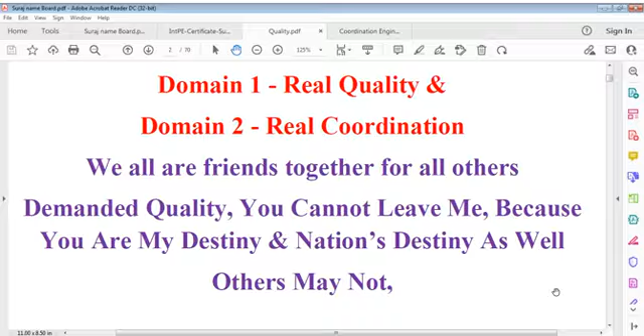That's what I say. It's a question of destiny of the project. It's a question of national destiny, and for engineers, it's their job. Engineers cannot run away. You cannot say I'm only a design engineer.

Responsibility exists because when you design, you have to consider the design of other services. They would raise you questions, or if they don't raise them, then you ask them how you are doing. It's not simply that giving a drawing is enough. They have to procure it also, and procurement means compatibility issues are involved for whatever item you buy.

It's a different factor. In civil engineering, we don't buy material ready-made, it's all done on site, on a batching plant, or whatever works. At least we get materials like tiles, finished materials, but that's also not complete, because we have to do it on site.

In the same way, you can buy some items ready-made in non-structural items, or in the structure itself we can buy reinforced parts, we can buy some other items, bushes, or raw materials. People call raw material natural metal, actually stone aggregate, or dust, sand or water. It means we have to deal with complete basic work, not built work.

In the mechanical world, built or fabricated works are delivered, similarly in electrical, or in the computer world, you can get a complete system. I don't think no coordination is required. The only thing is that we must have a complete system of that, and that's why I say quality is very important.

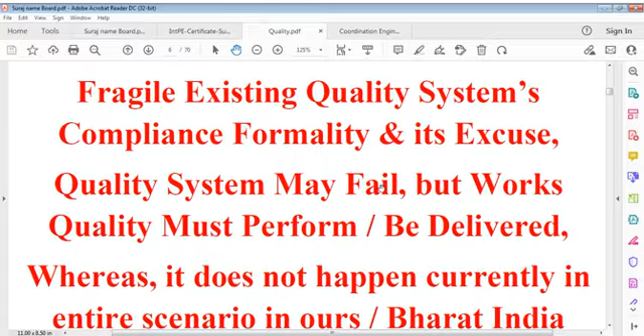We have to think further how to work. It has to work and it should comply. It's not simply formality compliance, it is application compliant. No excuse. Because the system is independent of product quality. The system can be fragile, can be broken, or can be maintained. But if quality is not achieved, in that case, the system does not mean anything. So what I say must be done. I don't want to just go every time.

Now we go to coordination. Reliable coordination in engineering projects is a very important point, because it's linked to people, it's the public of whatever nation, and engineers are involved. For reliable quality engineering deliveries, reliable coordination engineering is a must. It is professional engineering, a must for the profession. And if we miss coordination, it means we miss good engineering. No coordination means nothing, and I would stress people, I would stress everybody to coordinate as much as possible for better results. Otherwise, we have to suffer.

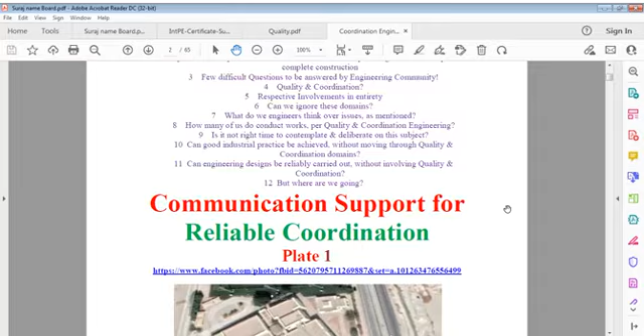And communication is a support for that. It's also a very important part. Quality and communication make this world. We cannot run away from this. How you do it is your own choice. Nobody can tell you about this because you are doing that job, you are master of that. And that's why you are an engineer, because you are master of that.

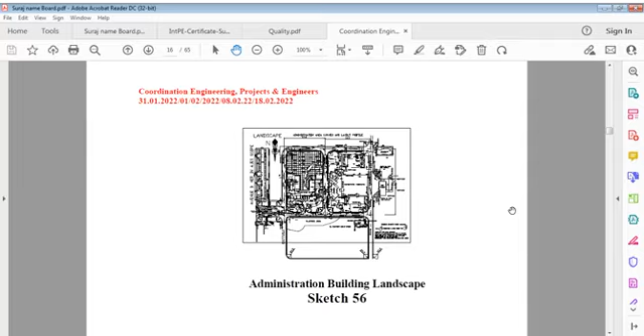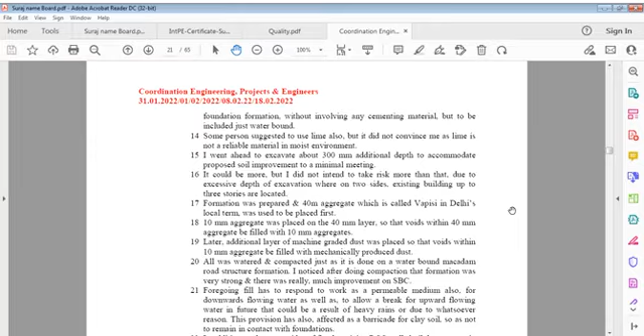Master means you know as much as possible, as much as is required, and if there's some deficient information, then you have to correct that, you have to take that information. It's not that easy, we think it is. It invites, it demands your attention. Your attention is a very important part in engineering, and that's why I always say continuation, or thinking, or how you think you can do it. That's a very important part, and it really happens if you think it's right or not right.

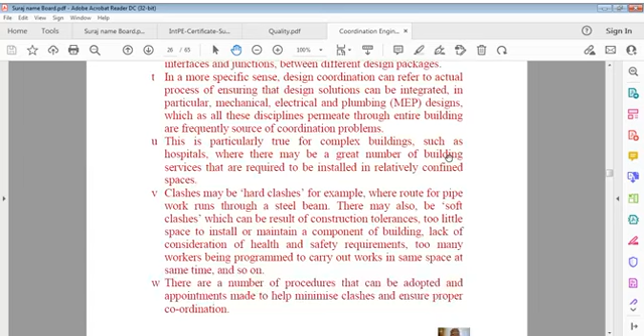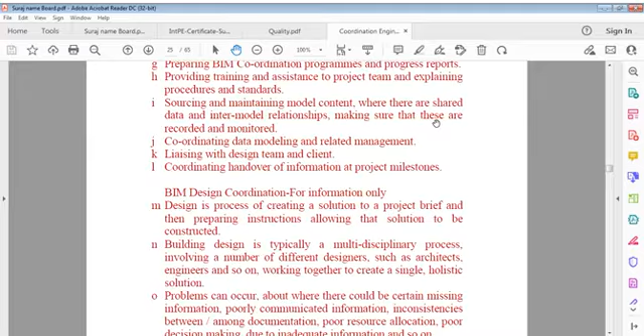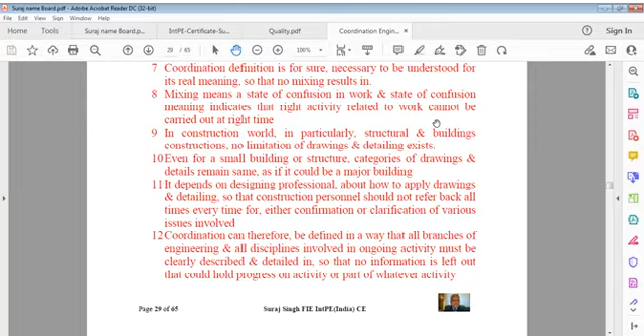Here's something I want to share with you. Of course, it's noting that doesn't go unnoticed. And I'm not going to talk about BIM design, because my mind is BIM. I think it's the mind that should be important rather than software for the purpose of doing work, because the mind tells a lot while others cannot tell. As I said, in every way, let us see what it says.

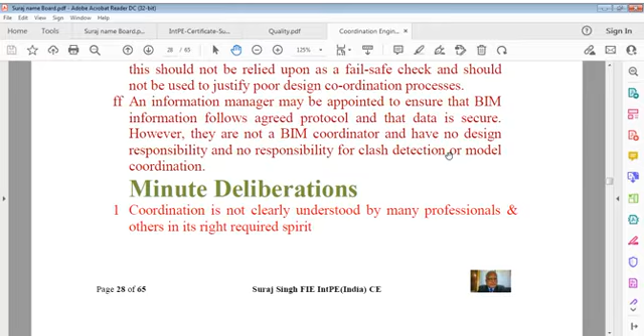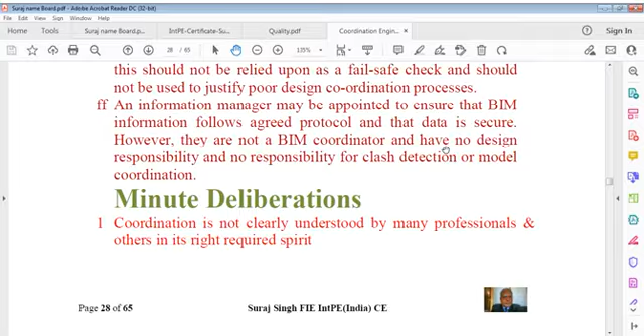Minute deliberation. Every day I talk a little in this case, and again I read for you that coordination is not clearly understood by many professionals and others in its right required spirit. They simply say coordinate, but explanation must be provided what is coordination, and that's what's important. Also, the fact remains that without adequate and efficient coordination in professional engineering, works cannot be successfully accomplished.

If I could claim, it shall be right to admit that coordination failure leads to engineering design and construction failure. Is that right? If I could claim, it shall be right to admit, it is correct to admit that coordination failure leads to engineering design and construction failure. Shall you agree? It is a fact. If coordination fails, it means your design, construction fails, design fails. We do want, you have designed excellently well, but a person responsible to do it could not get it, could not do it, and construction has been done, but it has not been done according to the mandate or design. I call design also a kind of mandate for that particular activity.

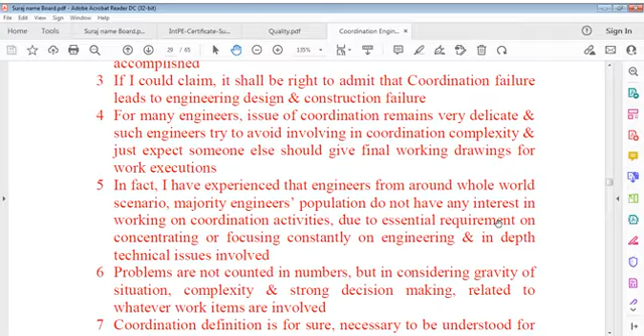For many engineers, the issue of coordination remains very delicate, and such engineers try to avoid involving in coordination complexity. They just expect someone else should give final working drawings or details for work execution. In fact, I've experienced that engineers from around the whole world scenario, the majority engineer population do not have any interest in working on coordination activities due to the essential requirement of concentrating or focusing constantly on engineering and in-depth technical issues involved.

You might have seen many engineering graduates from very reputed institutions, after getting through examinations, shift to other fields like management, MBA, or IT, because the outlook of these people, these engineers, is only the package of success and not true development. Engineering is the basics, is a fundamental of the development world. Of course, it cannot provide you that package, but it can provide you development. That's why I say, I have experience from world engineers, world people, and they run away from coordination. That is very bad for everything.

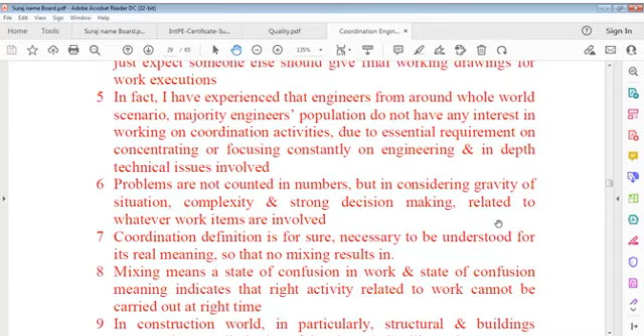And it happens particularly in many countries, including ourselves. Problems are not counted in numbers, but in considering gravity of situation, complexity, and strong decision making related to whatever work items are involved. That's where it's a very important point we have to consider. Why don't we consider it like that? That's a point of concern.

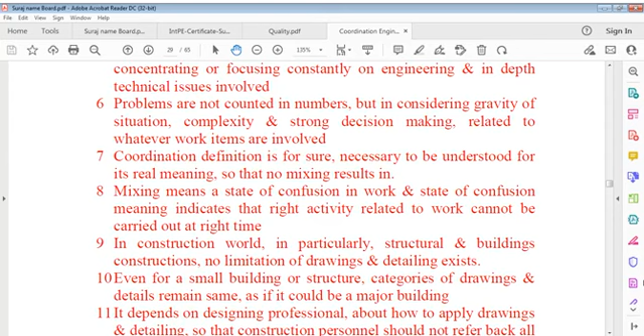Coordination definition is for sure necessary to be understood for its real meaning so that no mixing results in problems. Problems are not counted in numbers but in considering gravity of situation, complexity and strong decision making related to whatever work item or items are involved. Coordination definition is for sure necessary to be understood for its real meaning, and that's why it's really very important.

Mixing means a state of confusion in work, and state of confusion meaning indicates that right activity related to work cannot be carried out at the right time.

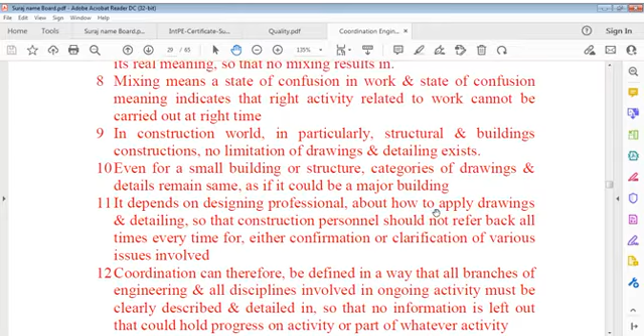In construction world, in particular structural and multi buildings, structures and buildings constructions, no limitation of drawings and detailing exists even for a small building or structure. Categories of drawings and details remain same, as if it could be a major building. It depends on design professionals, it depends on designing professionals about how to apply drawings and detailing so that construction personnel should not refer back all times, every time, for either confirmation or clarification of various issues involved.

Coordination can therefore be defined in a way that all branches of engineering and all disciplines involved in ongoing activities must be clearly described and detailed so that no information is left out that could hold progress on activity or part of whatever activity. It's very simple, you can explain it as well. So now it says coordination can therefore be defined, so we can define it rather than explaining it, in such a way that whatever branches of engineering are involved on that activity or on disciplines must be clearly described. Whatever activity we have to do, it must be clearly described and completely detailed in a way that no information is left out, or there is no blank to be filled in, that could hold progress on activity or work or part of whatever activity or work.

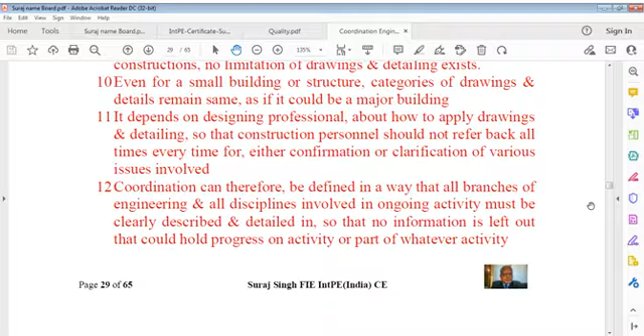In fact, coordination means all information is equally valued. These don't have junior or senior, or you can say inferior or superior. All information required is important from that viewpoint.

If one small information is left or is held without having adequate details or is not formally confirmed, activity can stop, or it shall be carried out based on either correct or incorrect knowledge possessed by site team, which work could be considered in contravention of what designing team contemplated. Consequently, it shall certainly lead to causing formal errors.

This paragraph is very important, I'll read it again for you. If even one small information is left or is held without having adequate details or is not formally confirmed, activity can stop, or it shall be carried out based on either correct or incorrect knowledge, or not clear knowledge, not confirmed knowledge, possessed by site team, which work could be considered in contravention of what design team contemplated. Consequently, it shall certainly lead to causing formal error.

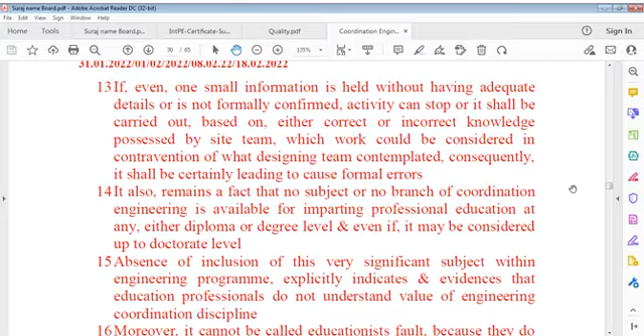It also remains a certain fact that no subject or branch of coordination engineering is available for purpose of learning, for imparting professional education at any diploma or degree level, even if it may be considered up to doctorate level. Absence of inclusion of this very significant subject within engineering programs explicitly indicates and evidences that education professionals do not understand the value of engineering coordination discipline.

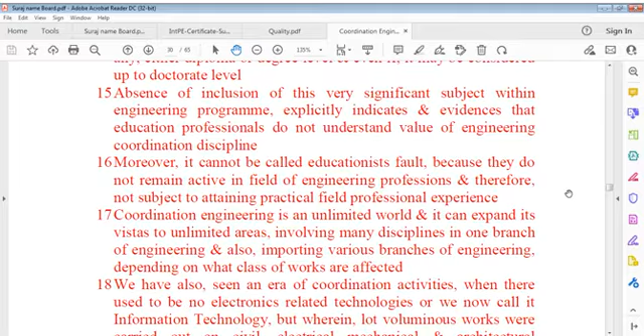I should not go into criticizing anyone, but it is a fact. I don't blame anyone individually; it's professional blame, and blame on those who set such syllabus and educational programs. Those people are not well versed in what happens in the engineering field, perhaps belonging more to the teaching profession without truly understanding how our work is carried out.

So we can say that coordination engineering is an unlimited world that can expand its vistas to unlimited areas, involving many disciplines within one branch of engineering, and also importing various branches of engineering depending on what class of works are affected.

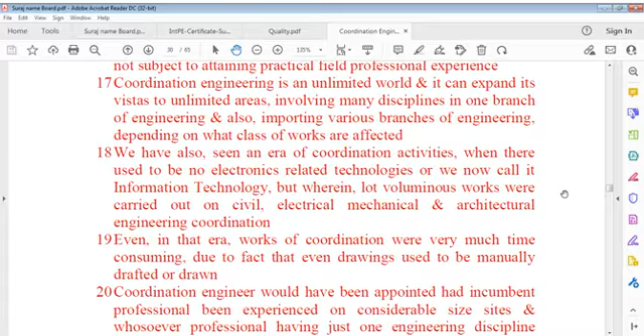We have also seen an era of coordination engineering before electronics-related technologies, what we now call information technology or digital technology, whenever large voluminous works were carried out in civil, electrical, mechanical and architectural engineering coordination. Even then, coordination was very time consuming because drawings used to be manually drafted.

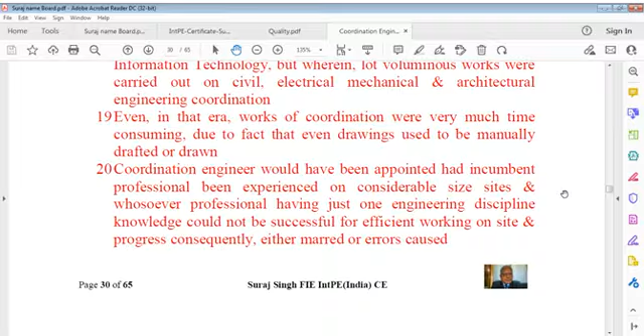A coordination engineer would be appointed only if experienced on considerable size projects, since a professional with just one engineering discipline's knowledge could not work efficiently on site, causing progress to be marred or errors to occur. This unhelpful situation forced professional engineers to work long hours to firmly grip design details, correlating one discipline with all others, consuming considerable allotted time.

An understanding of coordination's definition and description makes certain differences in the work. We may not call it teamwork for sure, because coordination cannot be done effectively by a team.

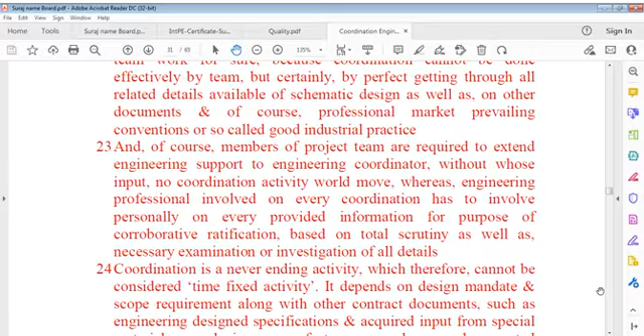The beauty of coordination is that it is a never-ending activity, which we can say therefore cannot be considered a time-fixed activity.

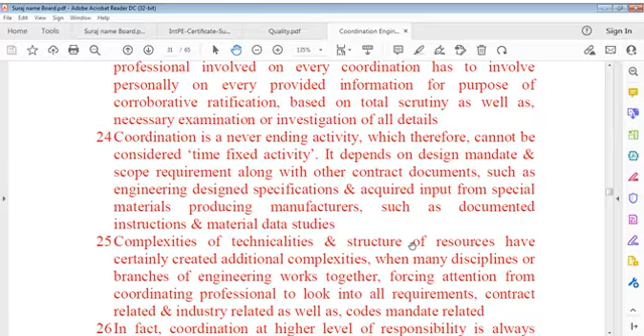It depends on the design mandate and scope of work requirements, along with other contract documents such as engineering design specifications, and acquired input from specialty materials producing manufacturers, such as documented instructions and material data studies.

Complexities of technicalities and structure of resources have certainly created additional complexities when many disciplines or branches of engineering work together, forcing the coordinating professional's attention to all requirements - contract related, industry related, as well as codes mandate related.

In fact, coordination at a higher level of responsibility is always a voluminous task, which requires working knowledge of various engineering branches plus additional in-depth knowledge of one's own engineering discipline.

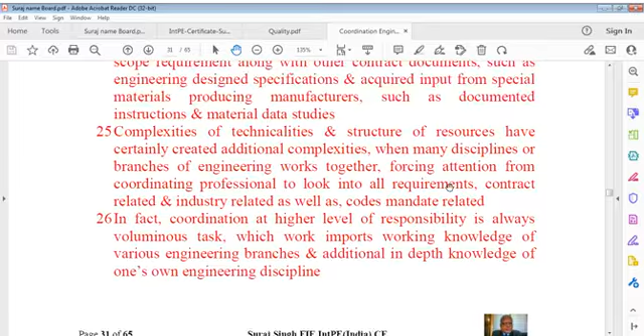It's also true that in current engineering and advanced project scenarios, just depending on certain proclaimed software is where we are weakening ourselves. If you depend on software, it may not be absolutely sufficient to automatically resolve details pertinent to various conflicts

existing among or revealed among various disciplines, and therefore no blind eyes can be allowed to trust the outcome of various conflicting details into physical working solutions.

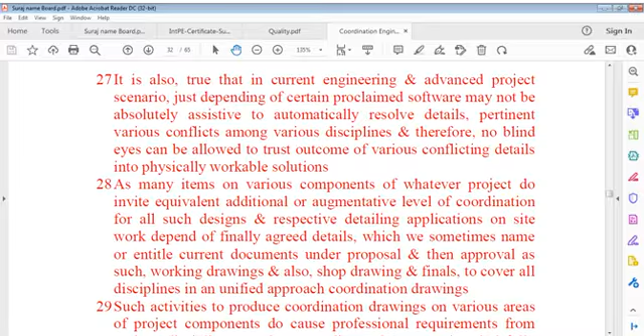As many items on various components of any project invite equivalent, additional or augmentative levels of coordination for all such designs and respective detailing applications on site, work depends on finally agreed details - sometimes named current documents, under proposal and then approval, such as working drawings, shop drawings, and finally, to cover all disciplines in a unified approach, coordination drawings.

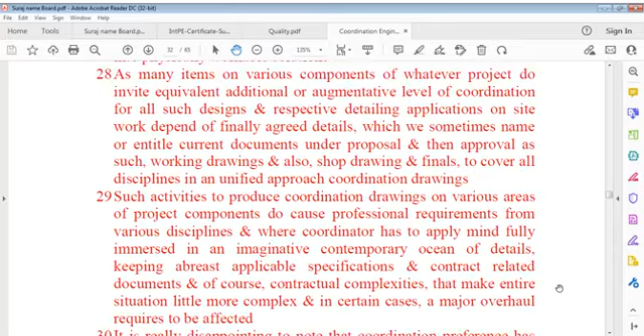Such activities to produce coordination drawings across various project components require professional input from various disciplines, where the coordinator has to apply his mind, fully immersed in an imaginative, contemporary ocean of details, keeping abreast of applicable specifications and contract related documents.

Contractual complexities make the entire situation a little more complex, and in certain areas a major overhaul is required. It's really disappointing to note that a preference for coordination has been found missing among engineers at the beginning of their professional careers.

When one tries to specialize just on its own discipline, even discarding its own branch-related other subjects, it's of course necessary for a professional to attain some specialization level. But simultaneously, one must move on parallel tracks with remaining disciplines and certainly try to join other engineering branches overlapping.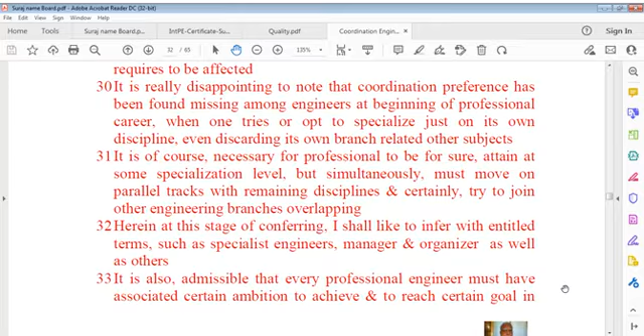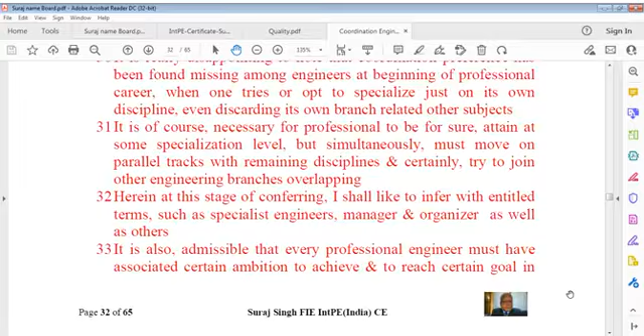At this stage, I like to refer to entitled terms such as specialist engineers, managers and organizers, as well as others. It's also admissible that every professional engineer must have associated certain ambition to achieve and reach certain goals in the professional world.

But this doesn't mean that such a professional shall have to leave all other aspects that apply within the profession for cohesive working. Focus should not find any final stop, but continuation of specialization and additional working specialization, as major requirements in engineering profession, because engineering cannot be replaced or overtaken by any other non-engineering professional.

One should consider positively that management or organization can be replaced by a professional engineer, whereas its vice versa does not apply, howsoever seriously one may try.

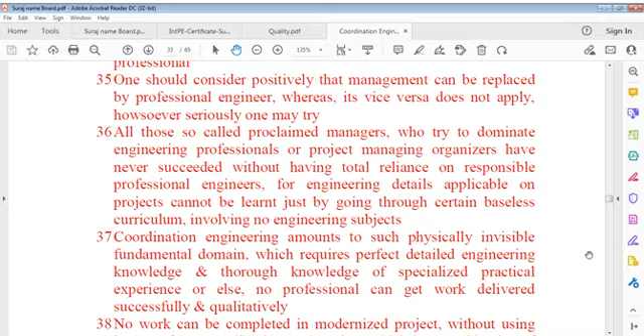I would only say all those so-called proclaimed leaders or managers who try to dominate engineering professionals, or project leaders or leading organizers or managers, have never succeeded without having total reliance on responsible professional engineers.

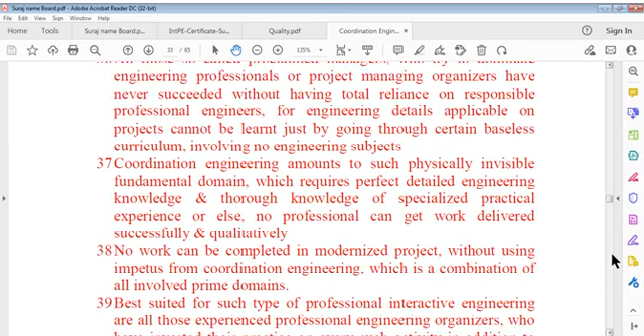For engineering details applicable on projects cannot be learned just by going through a baseless curriculum involving no engineering subjects. Coordination engineering amounts to such a physically invisible fundamental domain which requires perfect detailed engineering knowledge and thorough knowledge of specialized practical experience, or else no professional can get work delivered successfully and qualitatively.

No work can be completed in modernized projects without using impetus from coordination engineering, which is a combination of all involved prime domains. Best suited for such types of professional interactive engineering are all experienced professional engineering organizers who have invested their practice in every such activity, in addition to having attained respective expertise.

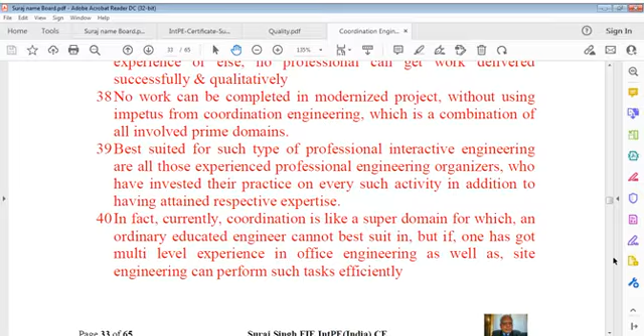In fact, currently, coordination is like a super domain for which an ordinary educated engineer cannot best suit himself. But if one has got multi-level experience in office engineering as well as site engineering, he can perform such tasks efficiently.

To be very frank in stating the definition of coordination in a nutshell, it can be acceptable to describe an engineer who can procure all related professionals belonging to respective individual disciplines onto a firm and final agreement on whatever involved project, component or components, and whatever activity applicable on a set of combination of all architectural, structural and services drawings, free from every clash -- it may be named as coordinated drawing for all practical working purposes.

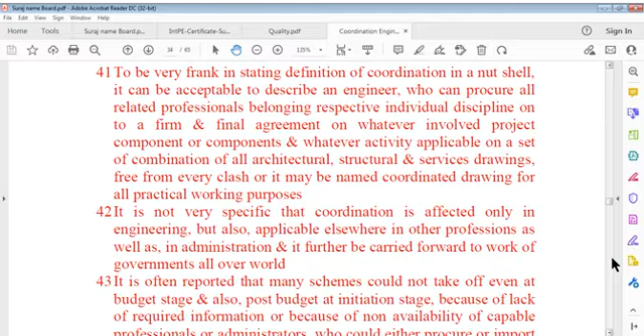It's not very specific that coordination is affected only in engineering, but it's also applicable everywhere in other professions, as well as in administration, and it can further be carried forward to the work of governments all over the world.

It's often reported that many schemes could not take off even at budget stage, and also post-budget at initiation stage, because of lack of required information, or because of non-availability of capable professionals or administrators who could either procure or import or force all respective personnel onto one page.

Consequence in case of failure leads to prorogation of all such projects for a longer duration, resulting in budget cost dissolution and rethinking to be made on every such project for sustainability.

Nowhere in the entire world can we find capable ministers who may be able to lead ministries in such a way that works move according to the required degree of coordination mechanism.

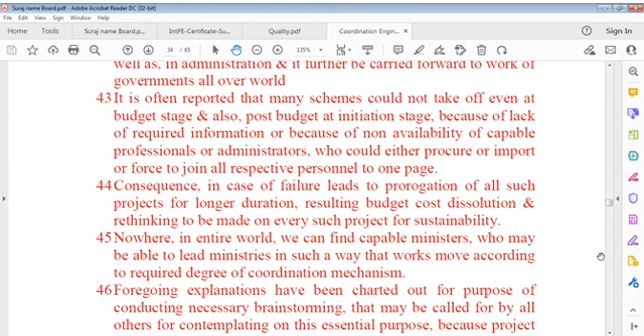The foregoing explanations have been charted out for the purpose of conducting necessary brainstorming that may be called for by others for contemplating on this essential purpose, because a project means absolute and optimum use of funds and not to waste funds for achieving futile results. But we cannot expect non-professionals to realize these facts.

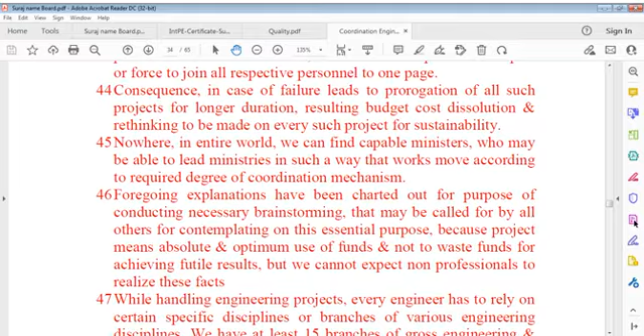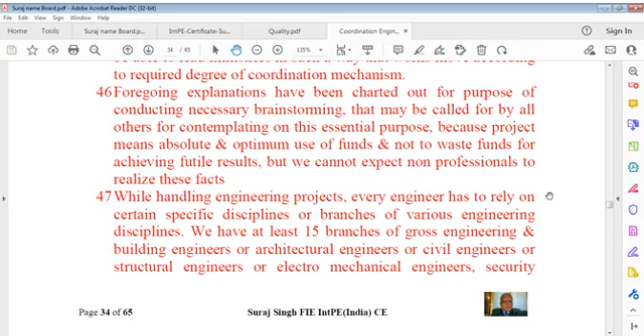While handling engineering projects, every engineer has to rely on certain specific disciplines or branches of various engineering disciplines. We have at least 15 branches of gross engineering: building engineers or architectural engineers or civil engineers or structural engineers, electromechanical engineers, security-related engineers, information technology engineers, etc., are required.

to work in a team structure to produce designs, details, as well as to carry out execution work at supervision level as well as at construction levels.

Even on buildings, we do not have all the complexities that are noticed on plant facilities or chemical processing projects, which location area spreads into many square miles and may consume many years for each project of designs and executions.

For that purpose, this is my email, same as I given, and these are my credentials. If some person is interested, you may use this information. I'm putting this here just for reference and information. I'll open the file of concrete specifications we had been doing here. Keep it for a moment here. If you want to see, you can read it. It's better for everyone to read it.

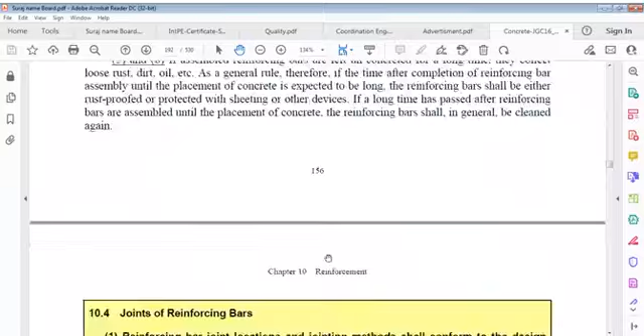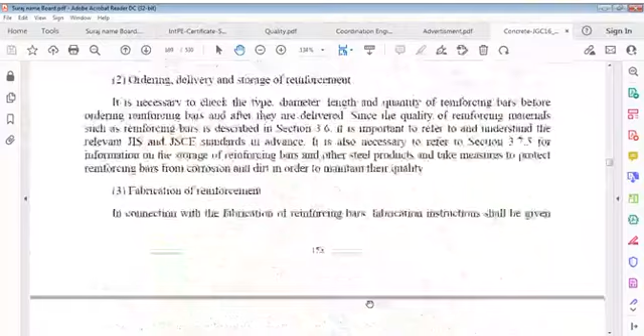Let us say where we were, I actually don't remember. I'll go back to this reinforcement, because this is first of all very complicated and very important for everybody to be clear about, because reinforcement is the life of concrete. We discussed about master plan, we discussed about ordering, delivery, fabrication and reinforcement. I'll just read it for you fast because there's nothing to explain.

Reinforcing bars shall be fabricated to shape and size defined on design documents using methods that do not cause any damage to these bars. Bars that have been bent once should not be bent again, because we discussed last time we should not bend bars, and we should not procure bent bars as well. Epoxy resin coated reinforcing bars shall be processed by an appropriate method suitable for their respective characteristics. General rule says reinforcing bars shall not be welded, and if there is no way except welding, then we must be careful that welded reinforcing bars are not bent at that location. Welded portions of bars shall not be bent.

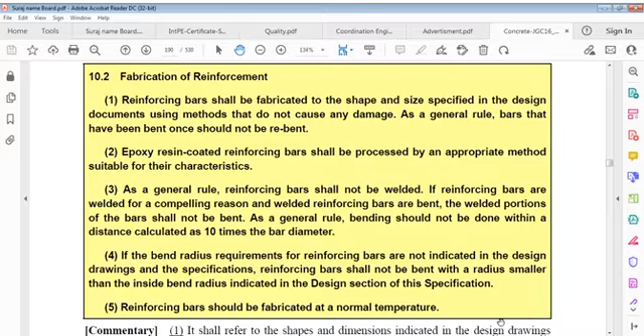As a general rule, bending should not be done within a distance equal to 10 times the bar diameter from the weld. If bend radius requirements for reinforcing bars are not indicated in design drawings as well as in specifications, reinforcing bars shall not be bent with a radius smaller than the inside bend radius indicated in designs.

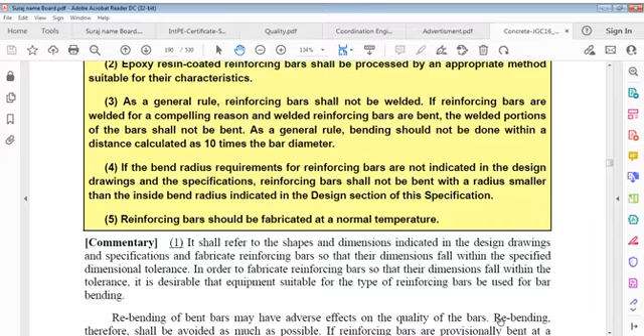Reinforcing bars - repeat, I did this last time - we shall refer to shapes and dimensions indicated in design drawings and specifications and fabricate reinforcing bars so that dimensions fall within specified dimensional tolerance. To fabricate reinforcing bars within tolerance, it is desirable that equipment suitable for the type of reinforcing bars be used for bar bending. Rebending of bars may have adverse effects on the quality of bars, therefore shall be avoided to the extent possible.

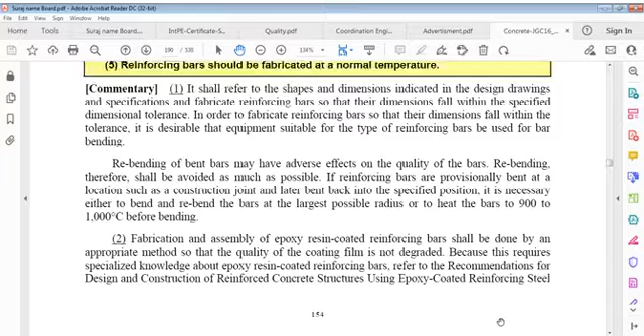If reinforcing bars are provisionally bent at a location such as a construction joint and later bent back or straightened into specified position, it is necessary either to bend or rebend bars at the largest possible radius, or heat it from 900 to 1000 degrees Celsius before bending, but that is not practically possible. Fabrication and assembly of epoxy resin coated reinforcing bars shall be done by an appropriate method so that quality of the coating film is not degraded.

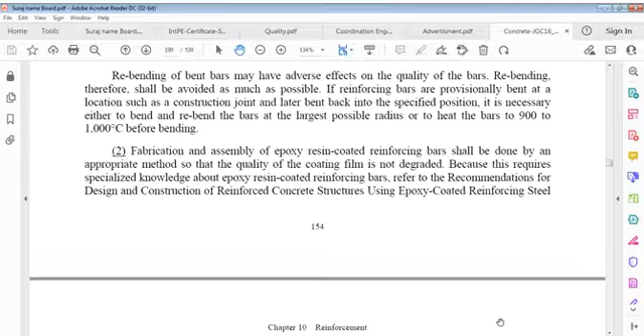Because this requires specialized knowledge about epoxy resin coated reinforcing bars, they should not be welded in general, as it may harm the quality of the bars. When it is impossible to avoid welding for repair or strengthening, the effects of welding on the welded reinforcement and performance of the structure should be investigated sufficiently, and site welding should be necessarily and sufficiently organized.

No bending should be made at a location closer than 10 times the bar diameter to the nearest welded portion, because of its fabricability and reliability. As a bar bending machine facilitates bending work of bars in large diameters under normal temperature, bending shall in general be carried out at normal temperature. When heat must be applied to normal hot rolled reinforcing bars, it shall be within the temperature range of 900 to 1000 degrees Celsius.

Rapid cooling should be avoided, as bars might be harmed by an inadequate heating temperature, rate of cooling, or bending procedures. It is important to control heating temperature sufficiently and avoid rapid cooling for bending.

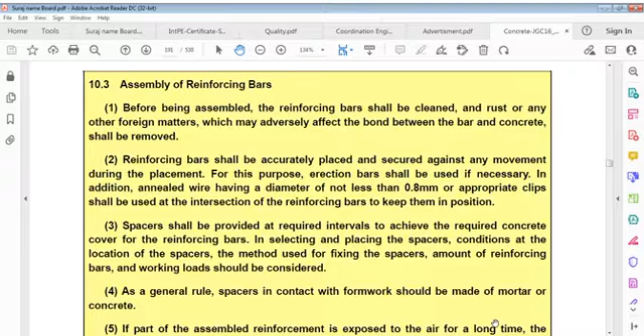Spacers shall be provided, meaning concrete covers, at required intervals to achieve the required concrete cover for reinforcing bars. In selecting and placing spacers, conditions at the location of spacers, the method used for fixing spacers, the amount of reinforcement, and working loads should be considered.

As a general rule, spacers in contact with formwork should be made of mortar or concrete.

If part of assembled reinforcement is exposed to air for a long time, reinforcing bars should be rust proofed.

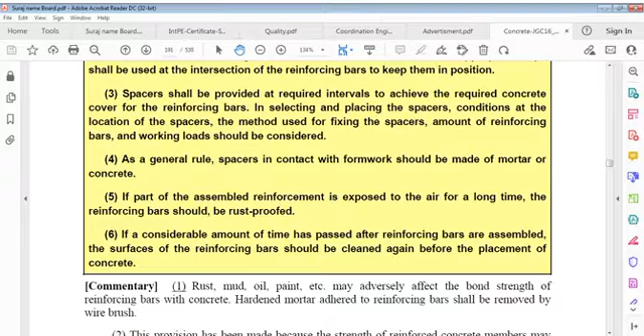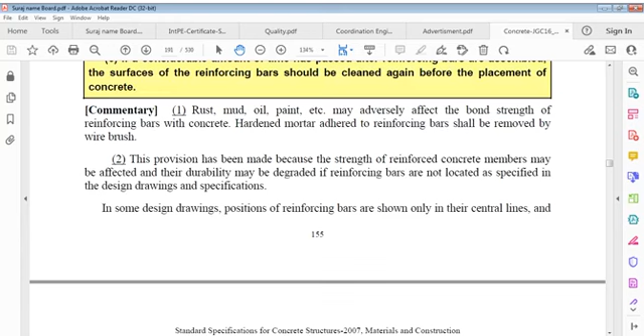This provision has been made because the strength of reinforced concrete members may be affected and their durability may be degraded if reinforcing bars are not located as specified in design drawings and specifications. In some design drawings, positions of reinforcing bars are shown only by their central lines, and cover may not be appropriately displayed.

Therefore, accuracy of reinforcing bar arrangement should be confirmed beforehand by preparation of an assembly diagram, in consideration of outer diameter and bending radius, and the assembly sequence of reinforcing bars.

Erection bars are required not only for preventing bars from movement but also for facilitating erection. Sometimes erection bars are not shown, but it is recommended that if used, from the viewpoint of durability, cover of the erection bar should also be ensured.

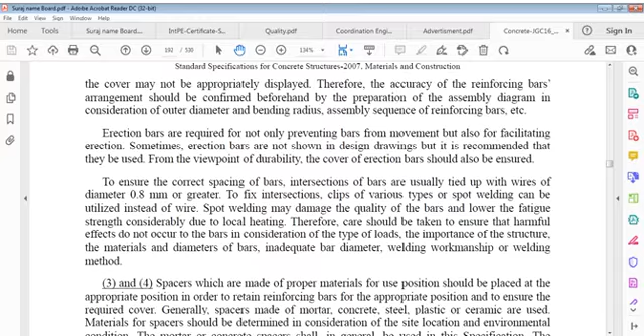To ensure correct spacing of bars, intersections of bars are usually tied up with wires of diameter 0.8 mm or greater. To fix intersections,

spot welding can be utilized instead of wire. However, spot welding may damage the quality of bars and lower fatigue strength considerably due to local heating. This is a very important point.

Care should be taken to ensure that harmful effects do not occur to bars in consideration of type of loads, importance of structure, materials and diameters of bar, inadequate bar diameter, welding workmanship or welding method.

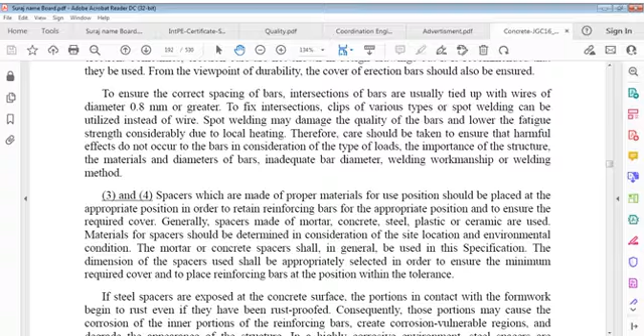Now, spacers which are made of proper materials for use. Position should be placed at appropriate position in order to retain reinforcing bars at appropriate positions and to ensure required cover. Generally, spacers made of mortar, concrete, steel, plastic or ceramic are used.

Materials for spacers should be determined in consideration of site location and environmental conditions. Mortar or concrete spacers shall generally be used in this Specification. Dimensions of spacers used shall be appropriately selected in order to ensure minimum required cover and to place reinforcing bars at position within tolerance.

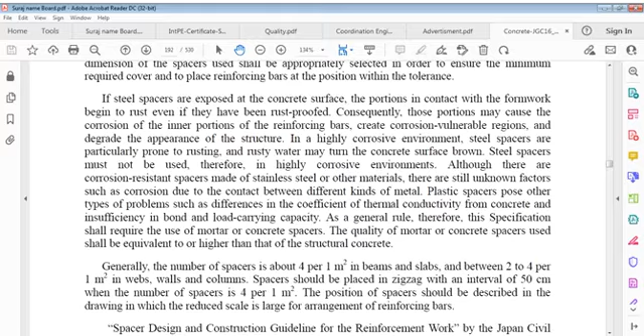If steel spacers are exposed at concrete surface, portion in contact with formwork begin to rust, even if these have been rust proofed. Consequently, those portions may cause corrosion of inner portions of reinforcing bars, create corrosion vulnerable regions, and degrade appearance of structure. In a highly corrosive environment, steel spacers are particularly prone to rusting, and rusty water may turn concrete surface brown.

Steel spacers must not be used, therefore, in highly corrosive environment. Although there are corrosion resistant spacers available made of stainless steel or other materials, there are still unknown factors such as corrosion due to contact between different kinds of metal. Plastic spacers pose other types of problems such as differences in coefficient of thermal conductivity from concrete and insufficiency in bond and load carrying capacity.

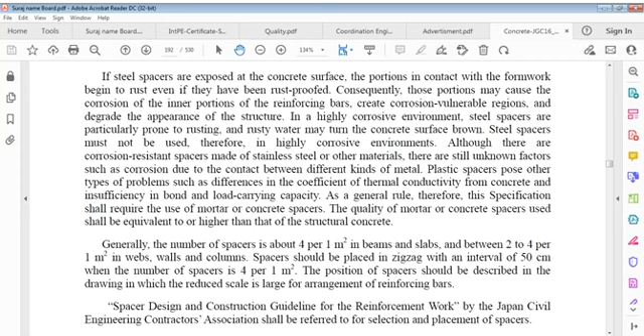Generally, number of spacers is about 4 per square meter, though it should be at least 8 to 10 per square meter, particularly on slabs. Generally, number of spacers is about 4 per square meter in beams and slabs, and about 2 to 4 per square meter in webs, walls and columns. Spacers should be placed in zigzag with an interval of 50 centimeters when number of spacers is 4 per square meter. Position of spacers should be described in drawing in which reduced scale is large for arrangement of reinforcement bars.

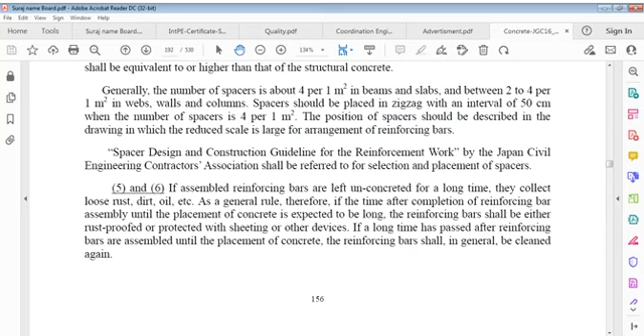If assembled reinforcing bars are left unconcreted for a long time, they collect loose rust, dirt, oil, etc. As a rule, therefore, if the time after completion of reinforcing bars assembly until placement of concrete is expected to be long, reinforcing bars shall be either rust proofed or protected with sheeting or other devices. If a long time has passed after reinforcing bars are assembled until placement of concrete, reinforcement bars shall in general be cleaned again.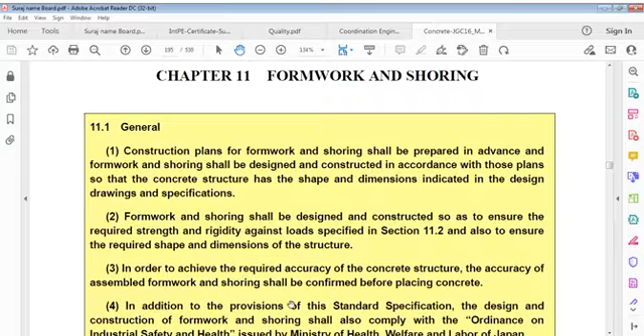Construction plans for formwork and shoring. Construction plans for formwork and shoring shall be prepared in advance, and formwork and shoring shall be designed and constructed in accordance with those plans so that the concrete structure has the shape and dimensions indicated in design drawings and specifications.

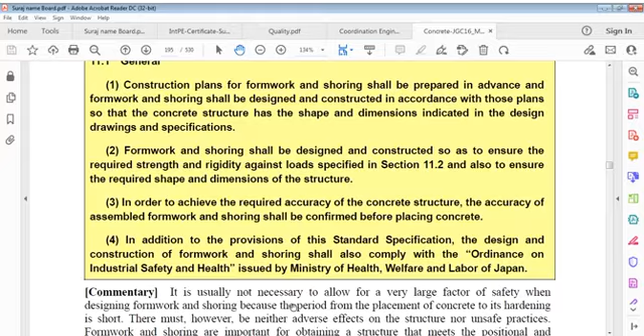Formwork and shoring shall be designed and constructed so as to ensure required strength and rigidity against load, and also to ensure required shape and dimensions of structure. In order to achieve required accuracy of the concrete structure, the accuracy of assembled formwork and shoring shall be confirmed before placing concrete.

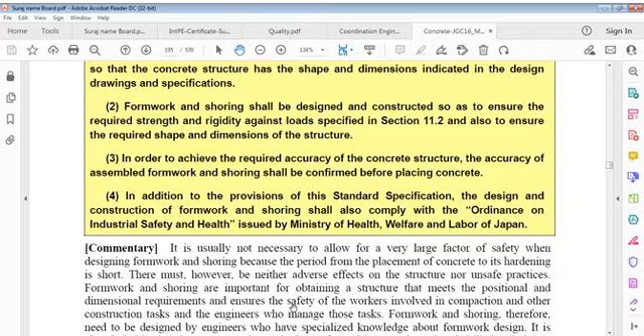In addition to provisions of this standard, design and construction of formwork shall also comply with it. It is usually not necessary to allow for a very large factor of safety when designing formwork and shoring, because the period from placement of concrete to its hardening is short. There must, however, be neither adverse effects on the structure nor unsafe practices.

Formwork and shoring are important for obtaining a structure that meets positional and dimensional requirements - that's what it said - and ensures safety of workers involved in compaction and other construction tasks.

Engineers who manage those tasks - so what it says, there must however be neither adverse effects on the structure nor unsafe practices. Formwork and shoring are important for obtaining a structure that meets positional and dimensional requirements and ensures safety of workers involved in compaction and other construction tasks, and engineers who manage those tasks. Formwork and shoring therefore must be designed by engineers who have specialized knowledge about formwork design.

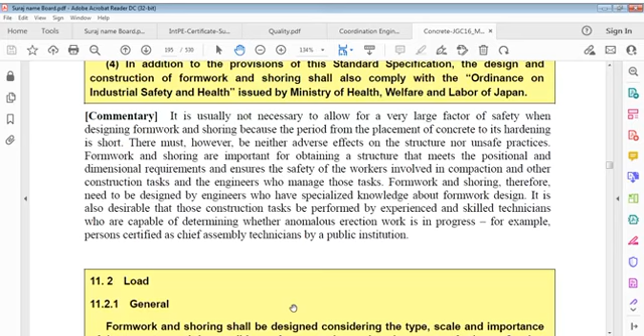Now it says formwork and shoring therefore need be designed by engineers who have specialized knowledge about formwork design. It's also desirable that those construction tasks be performed by experienced and skilled technicians who are capable of determining whether anomalous erection work is in progress - for example, persons certified as chief assembly technicians.